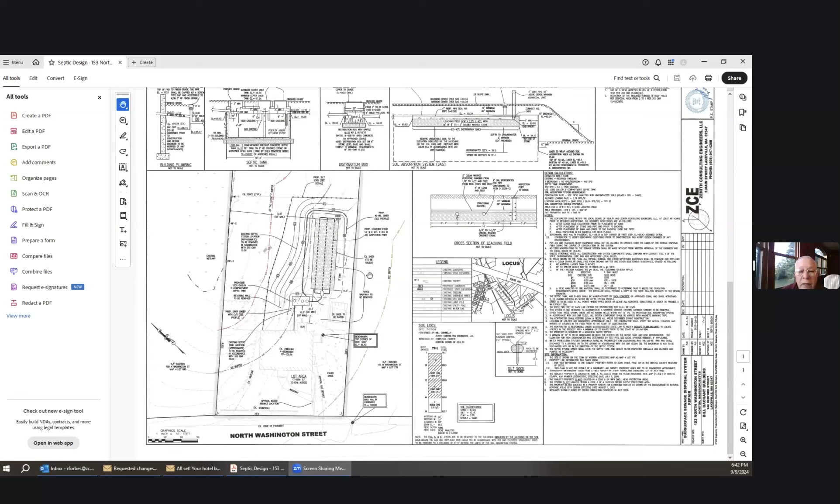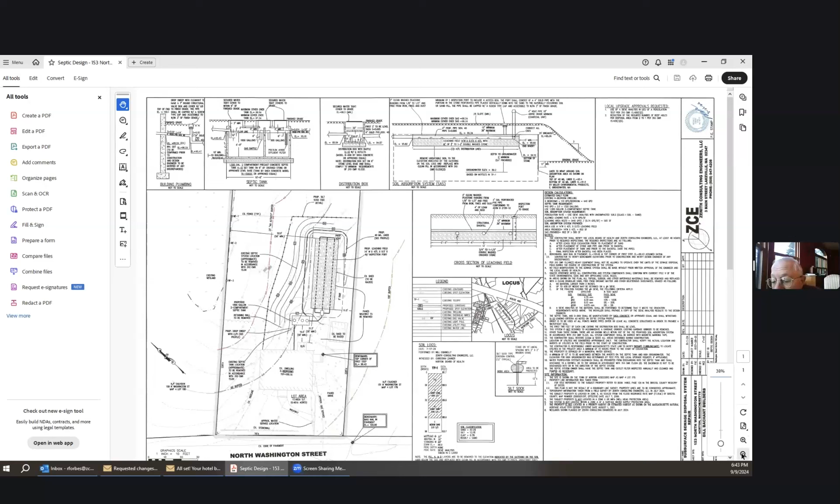Is everyone able to see that? We can, and if you can just expand it just a little, I think it'll be easier. Wrong way. There we go. Maybe one more. Wrong way. Doesn't really give you. There we go. Oh, I see. It doesn't. One more plus click. Oh, that may be too much. Okay, looks good.

Yeah, so the site is 153 North Washington Street. There's an existing 4-bedroom house with a failed septic on site, which we're proposing an upgrade to. As you can see, there is a wetland bordering the site to the west. We're proposing a 1,500-gallon septic tank, 14 by 43 stone and pipe leaching field, which we were able to keep over 50 feet away from the wetlands. There's also a couple sheds on the property that are going to be removed prior to construction of the system. And there's also a portion of a paved walkway, which is going to be removed and eventually loamed and seeded.

We're proposing silt sock, which goes around the limit of work. That'll remain in place until the site is stabilized with loam and seed. So if there's any questions, I'd be happy to answer them.

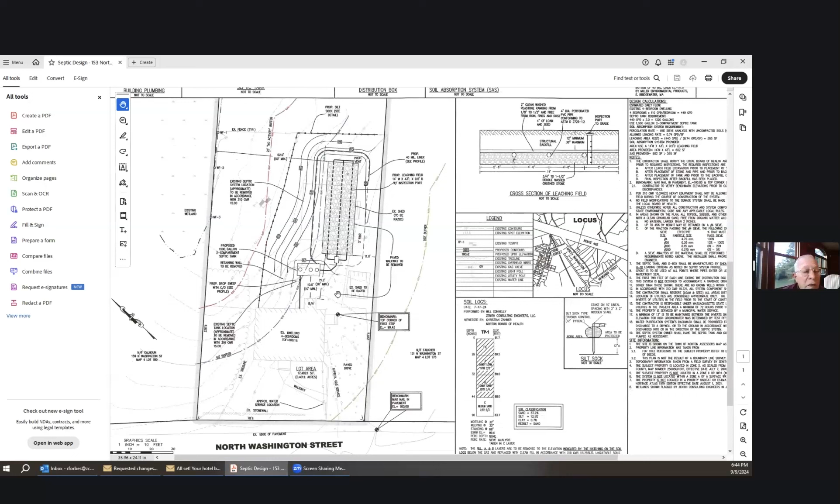John, I'm assuming this is pretty straightforward and you don't have any comments, or do you? No, in my memo that I provided the commission, I don't have any major red flags or concerns with this project. Any questions or comments from members of the commission?

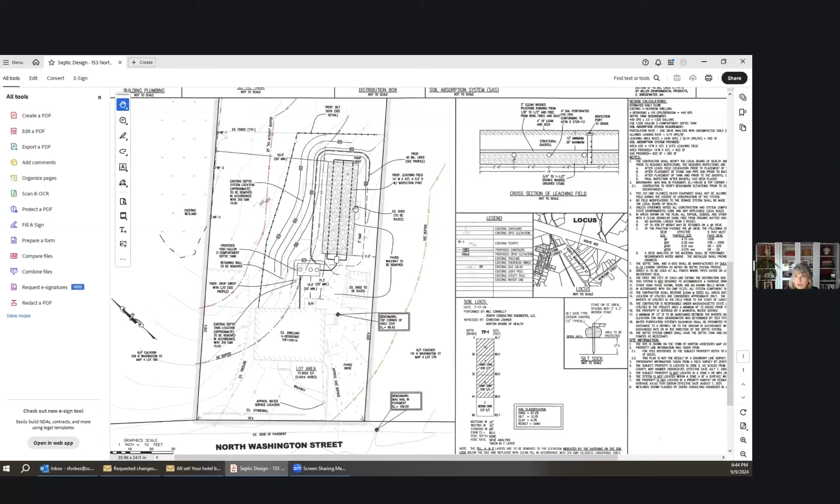I just have two quick ones. So is there a note somewhere in the plan that says all disturbed areas will be loamed and seeded after construction? And if there isn't, if you could add it. We do typically have one. Let me see if I can find it. Oh, yeah, I see it, 13 or 12. Can't see it quickly.

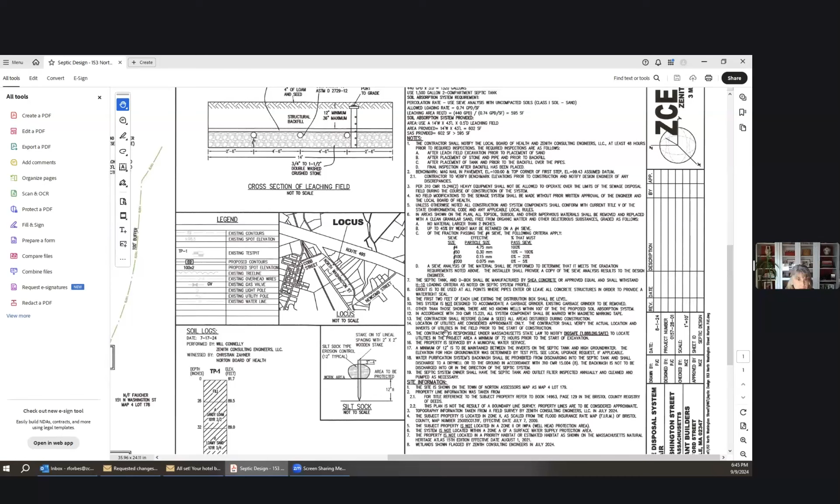Okay, and then your silt sock. So we no longer put the stake through the silt sock because it compromises the netting and the material right away. So I would just ask you, I won't hold up this issuance, to switch that detail out for a silt sock that shows the stakes on either side of it. Okay, yeah, we can certainly update that detail. Okay, that's all I have.

So any questions from anyone in the meeting? And you can either go to the reactions button and raise your hand, or just take your mic off mute and introduce yourself.

But if there are no further questions, this is a pretty straightforward repair with sedimentation control, a simple project. So I think we have enough information to go ahead and entertain a motion to close for issuing of an order of conditions at our next meeting.

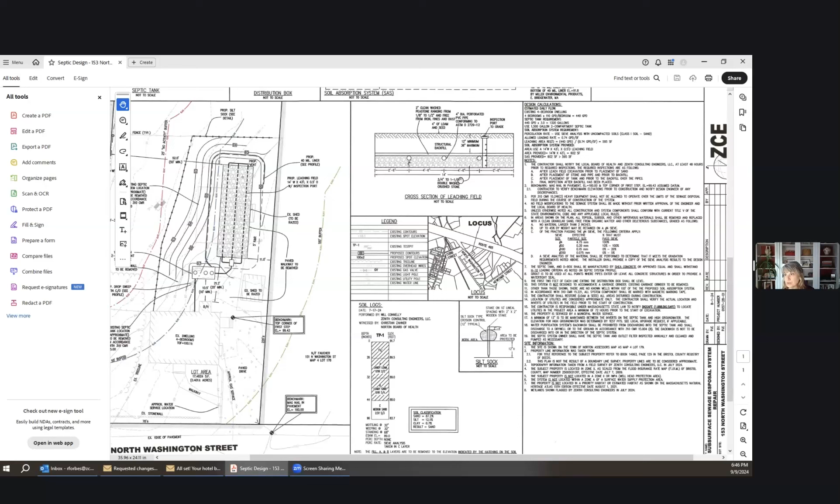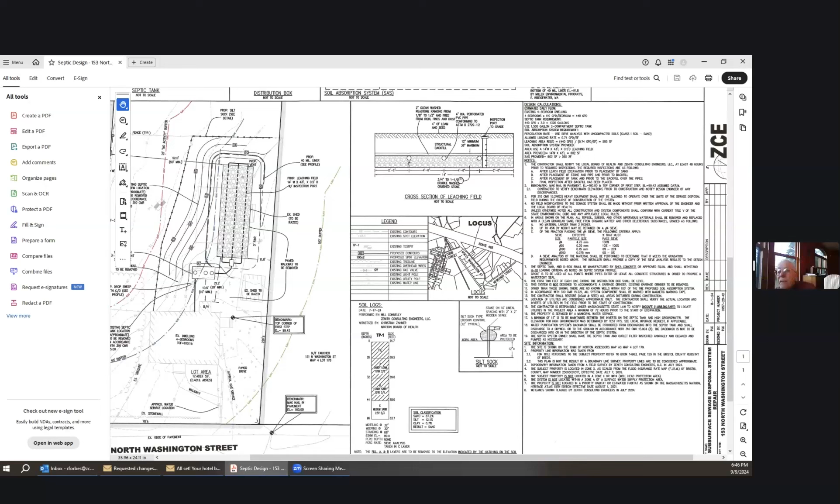I'll make a motion to close the public hearing for file 250-1164. Second. We have a motion by Lisa, seconded by Joe. Roll call: Dan and Tama, how do you vote? Aye. Aye. Mark, aye. Lisa? Aye. Joe and Paxton? Aye. Aye. And I'll throw in an aye. The motion carries. So thank you, Will.

I don't know if you really have to attend the next meeting, but we'll be discussing the orders and issuing the orders next time. And that meeting is on September 23rd. Okay, thank you all for your time. You bet, thank you.

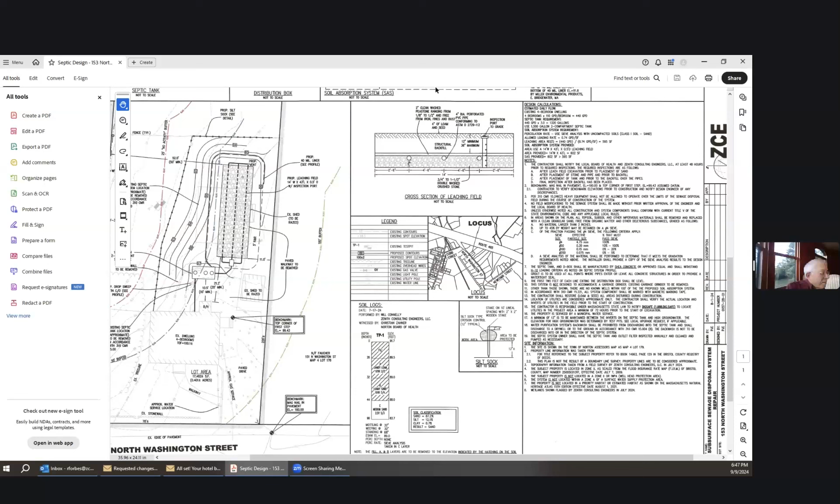Next hearing, it's also a new hearing, file number 250-1163. It concerns 400 Arnold Palmer Boulevard, notice of intent, and it concerns renovations at the golf course, in particular holes 2, 7, and 10.

So do we have a representative of the applicant? Yes, Mr. Chairman, Sarah Stearns with Beals and Thomas for TPC Boston. Also on the line is the club superintendent, Kyle Elliott, somewhere on here.

All right. And again, I think you'll be able to share your screen, Megan, should be all set for that. Can't do it yet. Right. Megan, you just want to transfer host over to me? Yep, thanks. You should be all set. You're good, sir. Okay, how's that? It's coming.

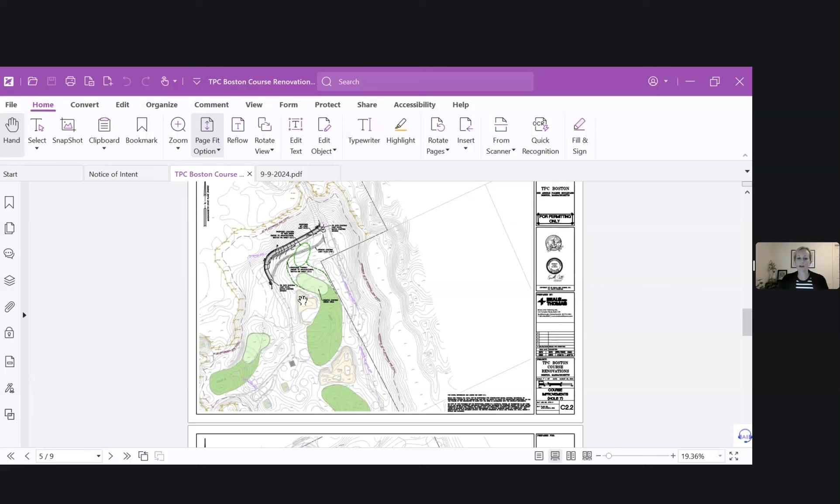And then finally, hole 10, which is in the northern part of the property — again, just a reorientation of the green area.

I should note that neither of the ponds on hole 2 and hole 10 are used for irrigation, so it's not necessarily water that's used for the club. These are natural ponds — well, this one's a natural pond, and just sort of an aesthetic feature and wildlife habitat area.

So again, this is buffer zone work proposed to modify this hole. I had seen multiple iterations of all of these designs to achieve the club's goals while avoiding and minimizing work in jurisdictional resource areas to the extent that made sense. So our final proposal to you is something that's been drawn and redrawn several times over.

This is just a sketch of the proposed mitigation area. We were fortunate enough to have John Thomas join us on a visit to the areas of proposed work. So thank you, John, for taking the time to do that and to look at these resource areas and what the club is proposing.

So that's really it. I'll pause there and I'm happy to answer any questions you may have, and Kyle as well.

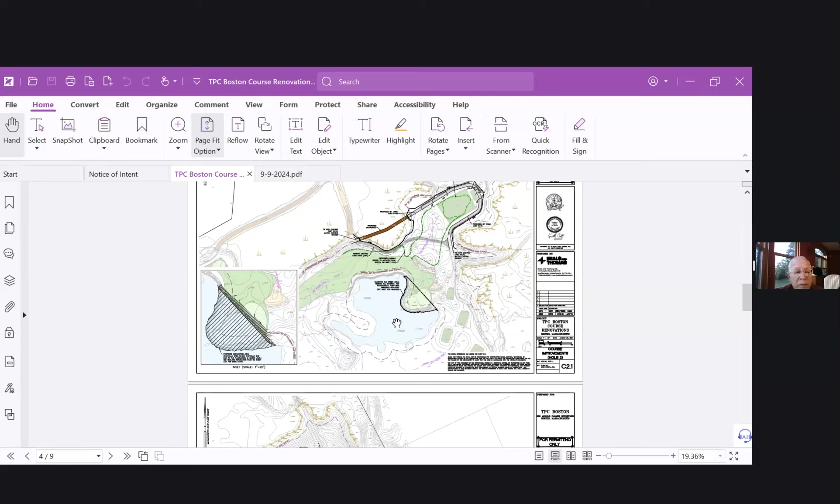Any questions from other commission members? John, do you have any comments? I have a question, go ahead.

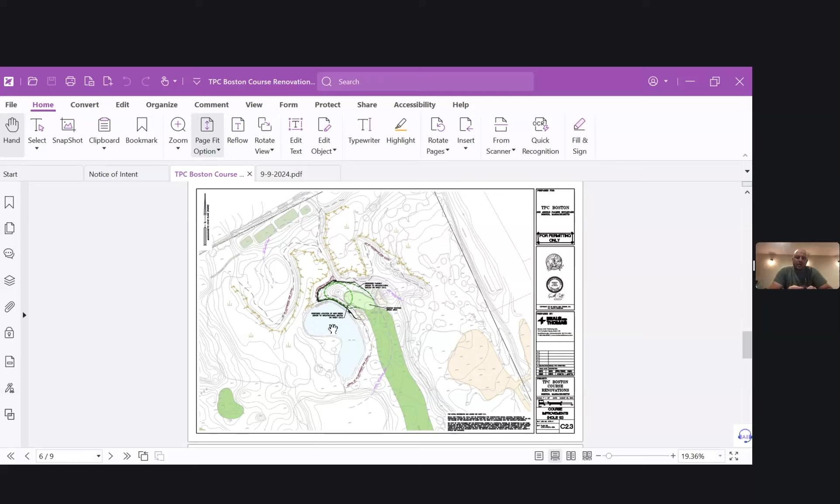On hole 10, where we're coming into that pond, is that a man-made pond? This one, I think, at least in part, was there when the golf course was constructed. I believe it was man-made and then slightly expanded upon initial construction of the golf course.

We're assuming jurisdiction on both, so we've added buffer zones to your local and the 100-foot, just a conservative approach so that we're showing everything being proposed in these areas. My question is, around this pond, will there be limited pesticide, insecticide, and fertilizer uses in this area?

We always limit any pesticides we're applying near any body of water, so we do minimal applications as possible. Our main focus is removing any invasives that begin to grow, and that's about it. I think that area and the proximity of the pond with the new green would largely remain unchanged from the current location we have.

One of my concerns is fertility leachage back into that area. So fertilizers or pesticides is the question. All of the above.

I would assume your complete best management practices addresses that, but these are obviously sand-based greens. Yes, correct, sand-based constructed greens with internal drainage, back to pond, back to basin. Each drain outfalls in a different area for each green. None of them, to the best of my knowledge, drain into a pond or waterway directly like that. Obviously our property has a lot of wetlands, as you can see from the maps.

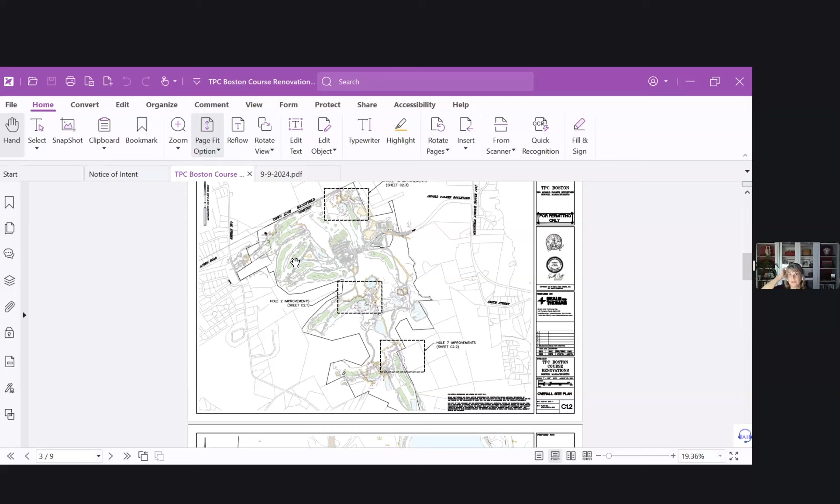Yeah, I have a number of questions. The first one is, the folks were before us several years ago, and at one point Jennifer, the last agent, had asked you to go back through the files to figure out what the cumulative impacts were for this course. I believe maybe the last order of conditions had that in the findings. So John Thomas, if you could find that.

So in other words, the meter's ticking, right? They only have 5,000 square feet that they can impact on this site. So at one point, they kept coming back to us for whatever they needed to do, and at one point we said, well, hold on, we've got to keep track of what's going on here. So we asked somebody to uncover that last order of conditions to see what limit we're at towards the 5,000.

And if we can go through hole 2 — can you talk about the detail of how that walkway is going to be? Is it pile supported? Is it going to span the wetland? What's the diameter of the piles, what it's made out of, what the grading is going to look like? I haven't seen any grading on any of these, probably just zoomed out a little too far.

These sheets are just overview sheets, but similar to the other footbridges we've permitted with the commission out here, same design, pile supported. Do you have a detail?

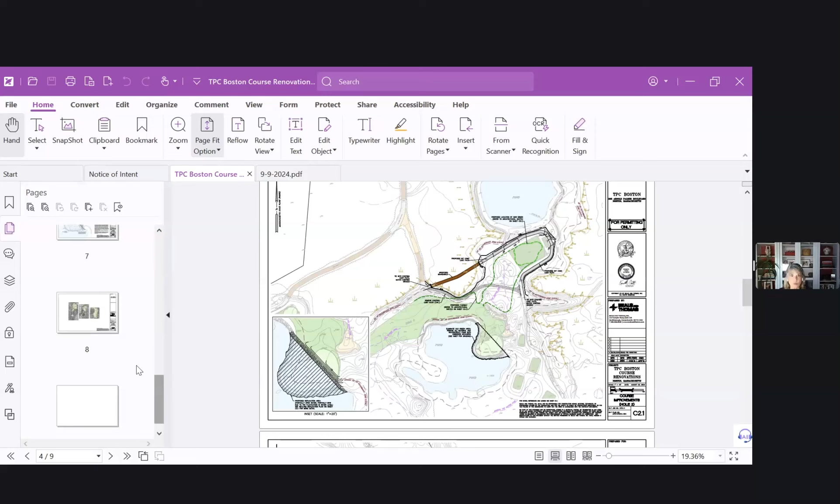I believe so, and if not, we're certainly happy to provide that. These plans are enormous, so it might take a second to load. Is it going to be timber, or what's it going to be constructed of? Yep, timber, like all the others out there, nothing different from what has been proposed and approved. The detail is on the 9th page.

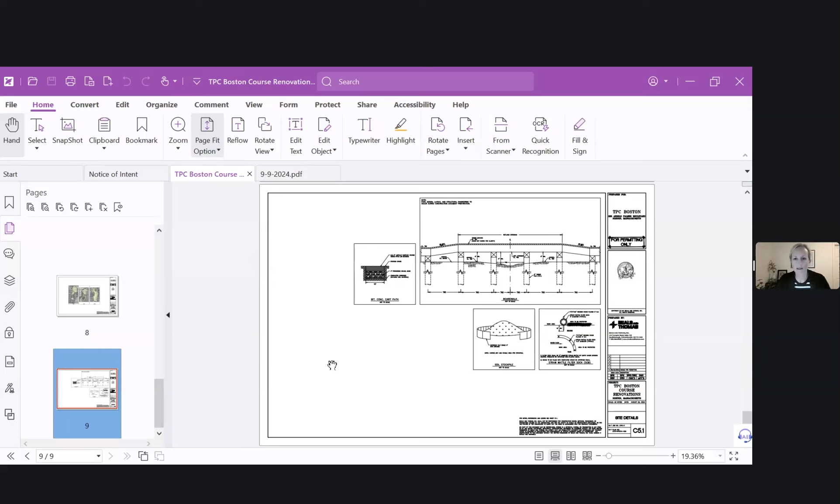So how many, is that a cross section? How many piles? I can't seem to center that on my screen for some reason. Okay, here we go. I'd have to get back to you on the number of piles, honestly. I don't have that information at my disposal.

Because we were told after our last proposal with the commission for a footbridge on the 8th hole, where the commission denied the project, we were issued a superseding order from DEP that the piles were not what the concern was for tabulating impact. It was the entirety of the surface of the bridge.

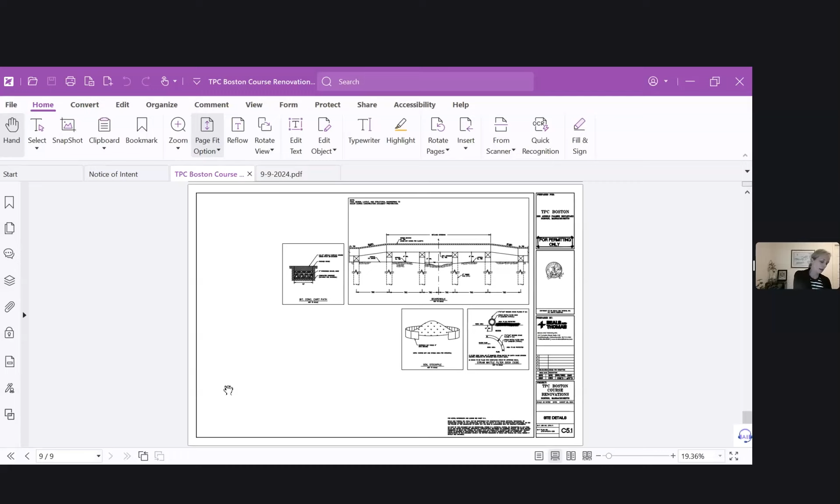So we appreciated that and took that approach for calculating impact on this one. I could make a note and get back to you on the number of piles for this length. Well, certainly, because although I appreciate the footprint of the bridge with shading impacts is the total impact, we're approving a bridge with piles. So we need to know how many piles you're proposing, or what the diameter is, how many there are. It's not just the footprint, we're approving the number of piles.

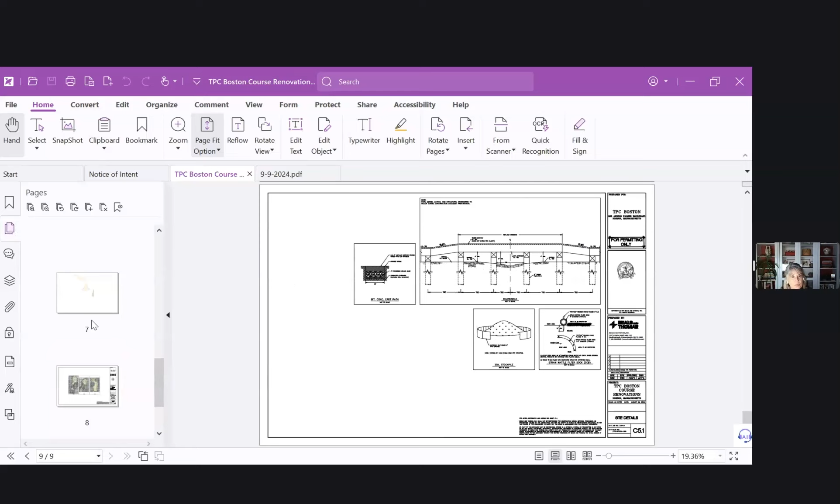No problem. So if you can go back, there's a grading plan? Just trying to get a handle on what the grading is associated with the footpath, and then maybe the touchdown points of the bridge deck. Yep, it's pretty minor since the grade is quite shallow in this area and we're connecting to existing paths.

This is not the best sheet to look at this. These are more just for presentation purposes, but we can get you something with an inset that shows the proposed grading. But again, since we're tying into existing grade where there's very little change, the required grading to make that transition is quite minimal.

Right, so typically when we approve a set of plans, it's what the contractor's going to use. So if you were to give this to a contractor, how do they know what the grades are? So that when we compare this to the as-built, we're not going to know if you're not showing us what the grades are. So we will need a grading plan.

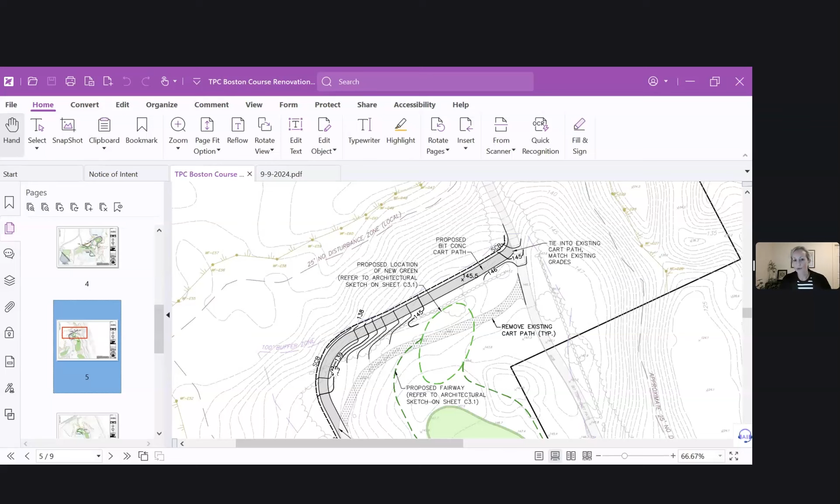Yeah, and in other areas of the proposed work, there is more grade, so you can see on sheet 7 where there's more grading involved. I think over here, there's just not much to show, but I will confirm that and get that back to you.

I'm also curious as to why—I understand it's a limited project, but typically you only play the limited project card if you can't meet the performance standards. So what performance standard can't you meet?

We can meet it, and you can ignore that—we can strike that. I'm always sort of mixed on whether I've been told to include it if you meet it, and other times we've been advised by DEP to not include it if you don't need it. So I put it in there. We can ignore it, we don't have to include that, but we can meet the performance standards, and obviously the replication is significantly beyond the impact. So ignore it.

So I would want to know, how does this 1,750 square feet factor into the impacts to date at the club? Are we approaching 5,000? You're already there. But I think the key is it's not 5,000 square feet for eternity on a piece of land, it is 5,000 square feet.

Then if that's mitigated, you're not limited to that for the rest of your life, or the rest of the life of the project or of the land. A perfect example to support that is the last footbridge the club proposed that was approved by DEP.

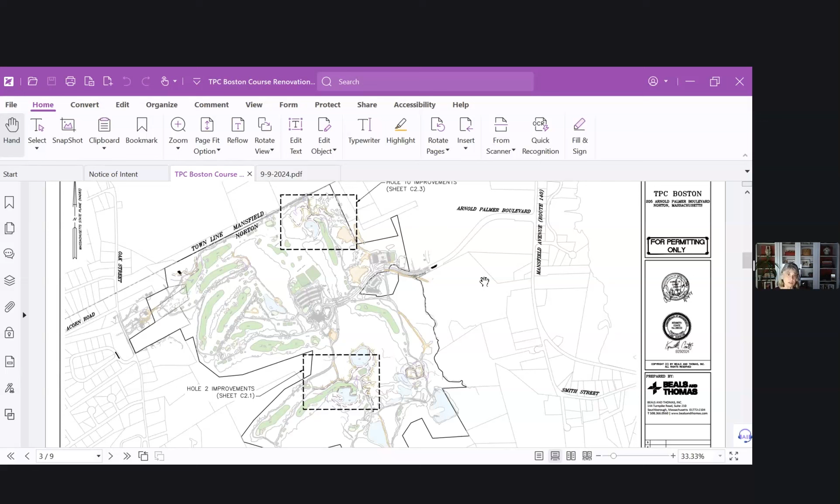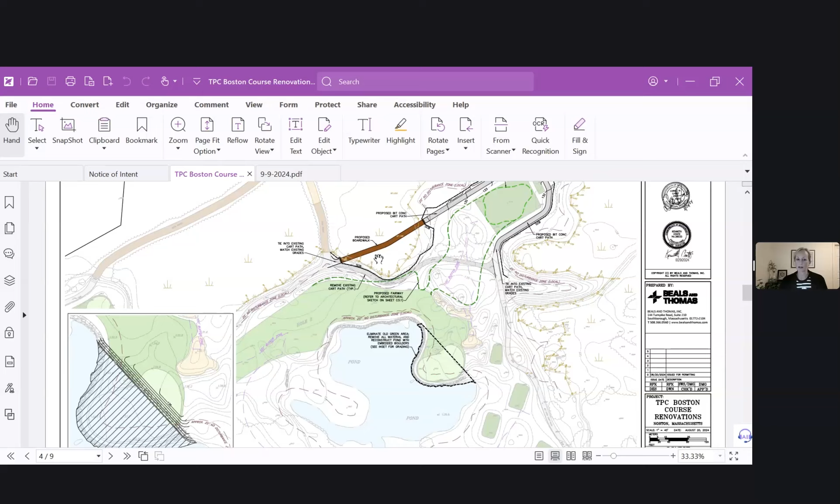If we can zoom in on number 2, please, again. So this is just like a wish list. It is necessary if this hole gets straightened out and pulled away from the pond, because this path is no longer viable. So yes, it is necessary to get the foot traffic off of the reconfigured hole. We tried to pick the crossing with the least amount of impact, tying into those existing paths. There's a shorter way to go, but there's more earthwork, more site work to get that bridge connected. We laid out a few different options crossing it at different locations, but the grading was more significant.

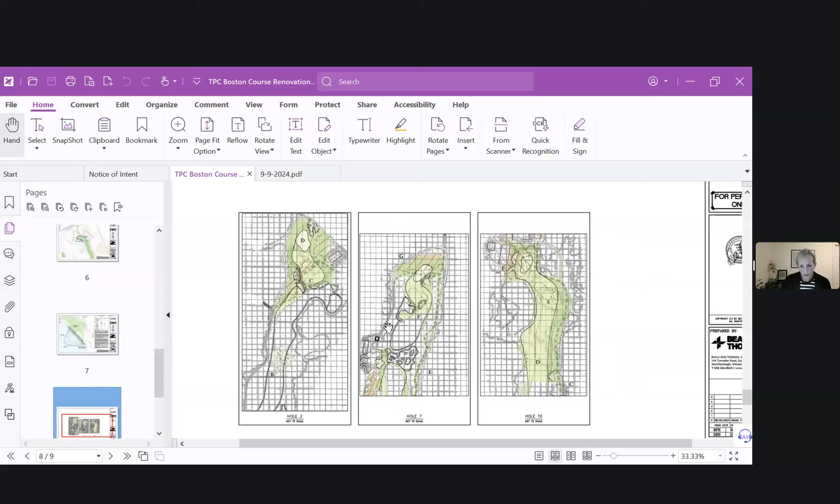Okay, and then are you showing any cut, you need to show the cuts and fills for the actual greens themselves? I'm just seeing a dashed outline, so I assume that's just the limit of the green and not the grading. So yeah, what we've laid out is based on an architectural grading plan, and this was sort of the vision by their golf course architect.

I would certainly not propose to grade a green as an engineering company, because that is a very specific skill for a golf course architect, particularly for a golf course of this caliber. If it's in the buffer zone, we can ask for some more information, but there's not a lot happening in this particular type of area.

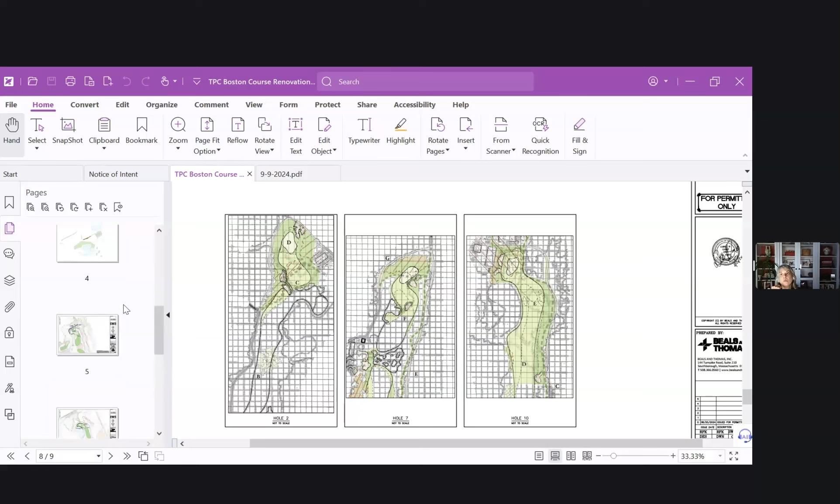Oh, all right, let's go back to 2. If you're proposing any grading to create that green, we need the grading, and it should be done by a civil, because we expect it every time somebody comes through the door. The landscape architect has the vision, the civil makes it come to life and makes it work. So that's the job of the civil. So I assume you're gonna have to get a civil on board.

We are a civil engineer, yeah. Okay, then you need to grade it out. So what's the top of elevation of that green going to be? We're at 133.8. We can revise that and get you something if you want to see.

We need to show the fill on the whole thing. Are you cutting? Are you filling? How is that green going to be constructed again? Because when we go back to the as-built, we have to look at how much fill did they put in, did they need a wall. This is basic. It's not a significant change here, but I hear what you're saying, understood. We would not approve line work. It has to be grading.

So let's go into that wetland. You mentioned that the functions and values of the pond right there, I think were those marginal on that side?

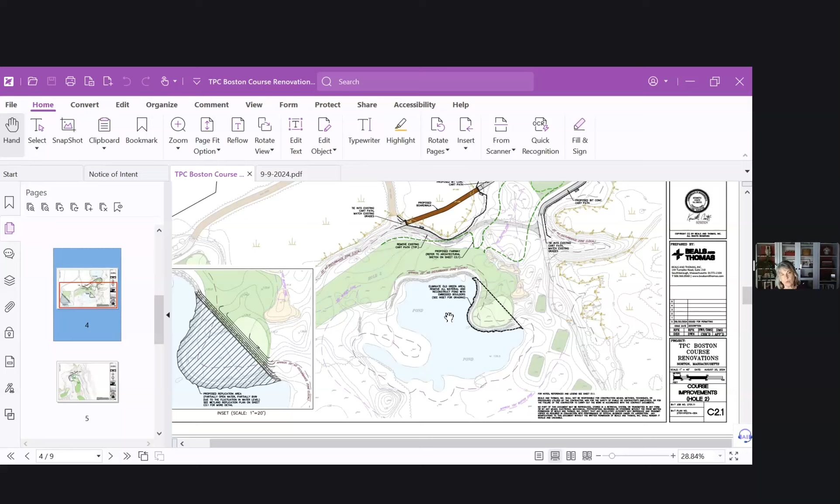So what I'm trying to get at is you're putting a footpath through a wetland. What's the value and function of that wetland versus what you're replicating? Is it marginal or high value? And what are we getting in turn for the mitigation? So you look at what you're impacting, what is the value of that wetland versus what you're recreating?

So this is a BVW, largely shrub saplings in this area. This area will be a mix of open water and palustrine shrub scrub wetland. Again, this whole area is variable depending on the season. The club is not using this for irrigation purposes, so the water level is not being artificially manipulated—it's really just seasonal change. So we're seeing a pretty diverse, ever-changing wetland system made up of open water and that emergent shrub scrub area.

So they are very close, at least in proximity. But to your point, this is a BVW and this would be replicated as open water and shrub scrub—not identical, but something that I think would add value for a variety of purposes in this particular area. But open water is not the same as a BVW.

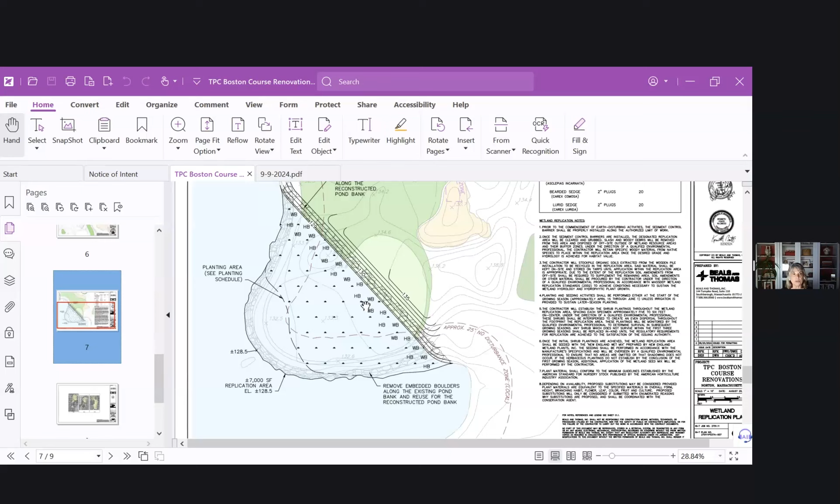Yeah, and we've seen on the other footbridges on the property—to the letter of the law it's an impact, but there are a lot of footbridges out here, and the areas below and adjacent to them are really thriving. So it's not a desecration of the BVW that it runs through; they've been built and maintained to the point where there is still sunlight being captured. We've got growth under and around all of them. We've got to follow what the regulations say in terms of impact mitigation, certainly, but for the commission's understanding, this is something the club has done numerous times, and I would say successfully. I think yes, it's an impact, but it's not a loss of BVW.

So in summary, we're gonna need to see grading around all those greens for 2, 7, and 10, and some details of the crossing itself—how many piles, quantification of the difference, the delta between the BVW and the open water sheet. And any cumulative overall impacts, so we can carry that forward in our findings. Are there any flood zones out here?

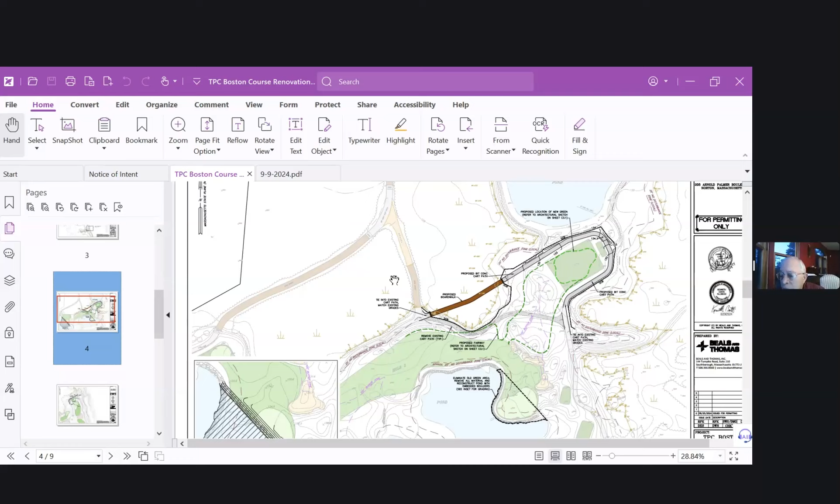So we do have a variety of items that need to be discussed, so I think we will need to continue this hearing. Our next meeting is on the 23rd of September, and we have October 7th and October 28th after that.

Do you have a preference? You want to continue to the next meeting? When would the supplemental information need to be received? I guess that's kind of the key for timing. So I need the information the Thursday before the meeting so I can take a look at it and then provide a report to the commission.

Okay, the 19th then? John? Yeah, I think we can do that. That's more than a week to get that pulled together. I think the 23rd is good for you? That works for me.

All right, so unless there are further questions, I think we can consider a motion to continue this hearing. So moved.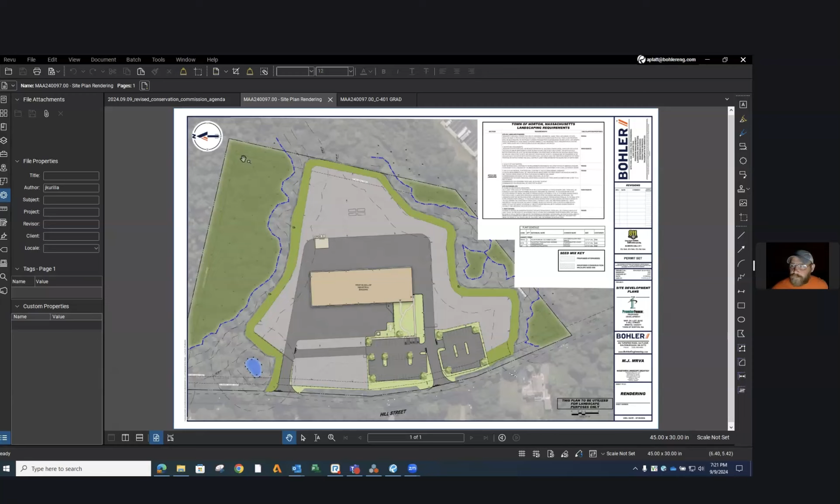Correct. I have a question—did we do anything to address the fuel storage area? We haven't revised the plans yet, but there will definitely be secondary containment, and I believe you wanted us to move the fuel pumps within the paved area, so yes, we will do that.

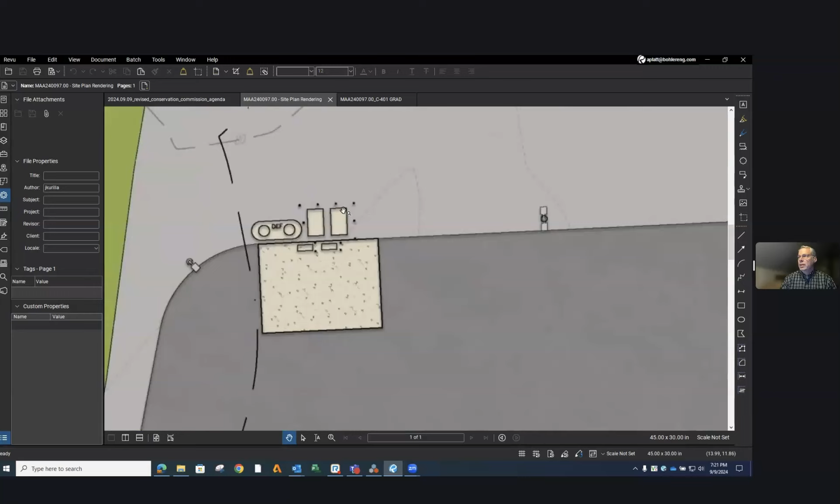Will there be any bollards or anything around the structure for additional protection? Yeah, we're going to put bollards around—those little black dots are the bollards—and this plan will simply move those forward into the paved area. Thank you.

Any other questions from either commission members or anyone in the meeting?

So this is still something that has additional information coming forth from peer review, is that correct? Correct. We were expecting those peer review comments either last Friday or today. We still haven't seen them, so hopefully we'll see them tomorrow, and the plan is to turn those responses around as quickly as possible and get them to you.

I believe you just stated you need to see things by the 18th in order to be heard or be on the next meeting. So that's the plan right now, but it depends on when we get those peer review comments. Andy, the first thing Megan's doing tomorrow is hounding Weston and Sampson to get you that peer review—it's been long enough. Okay, thank you. You're welcome—they're getting sick of my emails, I promise you. Good, glad to hear it.

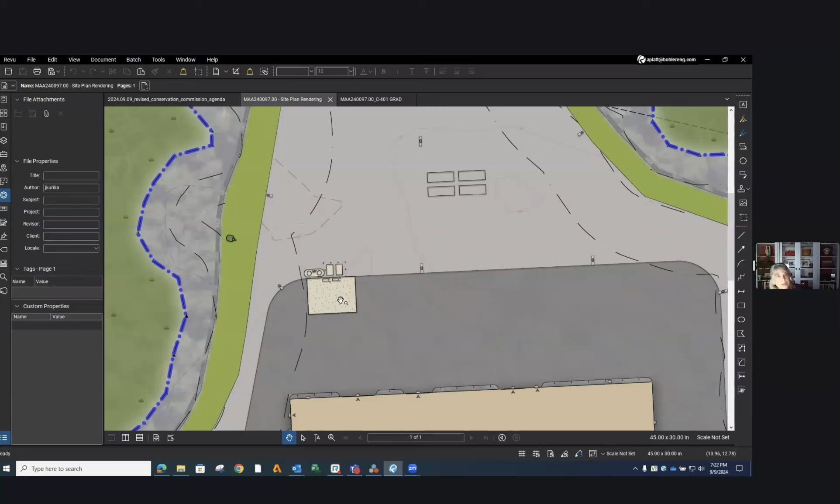So I just did have one question—where is the location that the forklifts will be kept?

When they're not in use? Yeah, I'm not sure if it's gonna be inside the building, but it'll definitely be on the pavement. All vehicles will be stored on the pavement at the very least.

So ideally, if you're going to leave that laydown area as stone and it's only a forklift going back there, is there going to be any type of fence or buffer between the edge of the pavement and the laydown area so trucks won't be tempted to drive back there?

No, we don't have any kind of barrier right now. I can address that, Andy. So the material is stored in aisles. The trucks will not drive down the aisles, there's no reason for them to go down there. Just imagine a lumber yard with aisles of stock. The forklift goes out, retrieves the material, brings it into the shop, we manufacture. The truck comes into the yard, we unload it on the pavement, and we take that stock and put it into the gravel inventory areas.

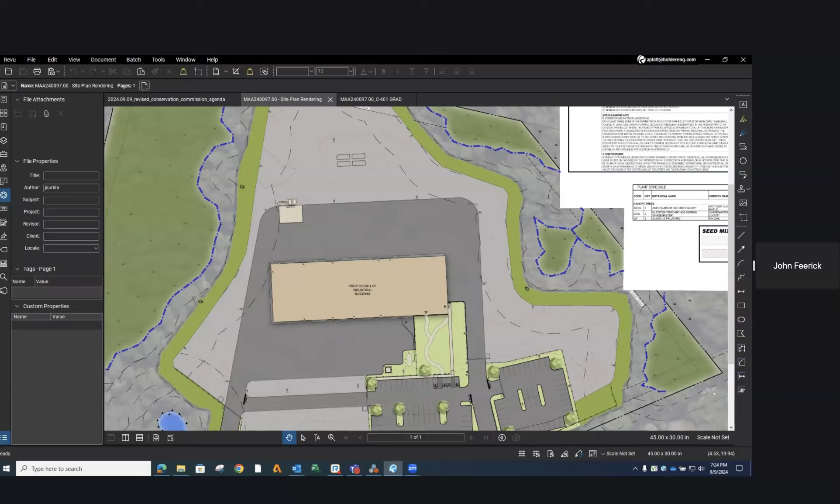Okay, hope that does it. Yeah, we just don't want to be like the truck police here, and have to look at this two years from now and see a bunch of equipment and trucks all over the place back there. We don't want to be in that position.

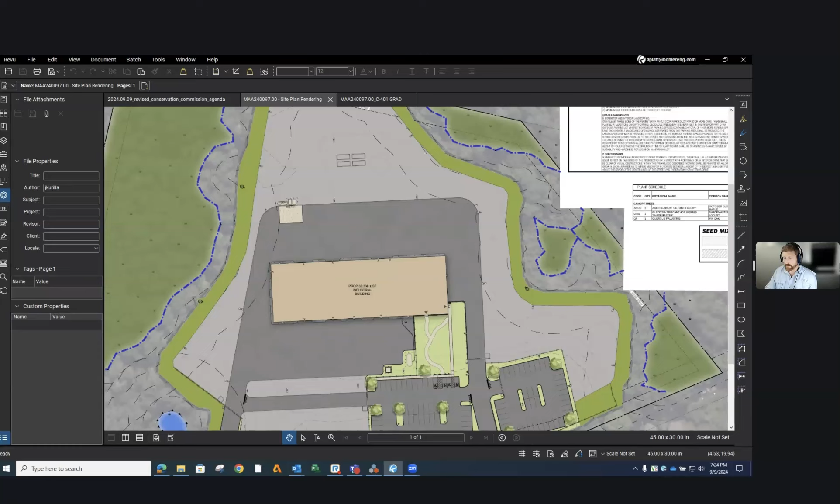Right, and the only purview we would have is within 100 feet of the resource area for this project anyway. So that'll be a condition in the order we issue, that storage of vehicles cannot be within the 100-foot buffer, unless it's within a paved area, and that would specifically say something like that.

Would the applicant and his client be okay with that? Yes, that's our intent. Okay, so that would be a potential condition in any issued order for this project. Okay, thank you both, Johns. Thank you.

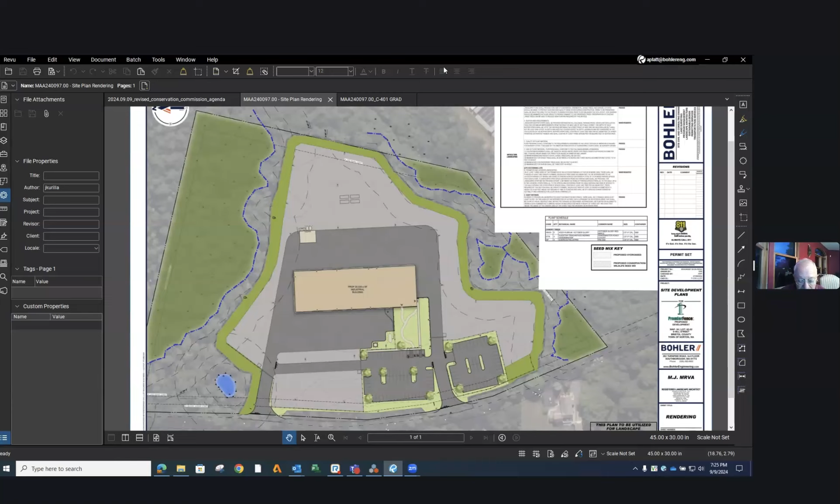All right, unless there are further questions or comments, I think we're all set for a motion for continuation until September 23rd. So moved. Second. So Dan, that was you, right? Yes. Motion by Dan, seconded by Joe.

Tama and Paxton, how do you vote? Aye. Aye. Joe and Lisa, aye, aye. Mark and Dan? Aye. Aye. And I'll throw in an aye as well. Thank you, Andrew. We'll see you next time. Okay, thank you very much.

Thank you. All right, that concludes our public hearings. We now have requests for certificates of compliance, and all of them are listed as being stabilized and all set for full COCs.

Our first is file number 250-1157, 5739 Anton Drive. I believe it was a septic system upgrade, and that is listed as fully stabilized. Yeah, this one was the one they had to do real quick, an emergency repair, so they actually got the seed stabilized, which was good.

I just noticed the number after this is also 1157, so which number is it? Where is 1157? Sorry, the one that's 1157 for 120 Mansfield is incorrect. Okay, so that one should be on the actual agenda. Oh, okay, sorry, yeah, I'm looking at your notes. Okay, yep, 120 Mansfield's 1109.

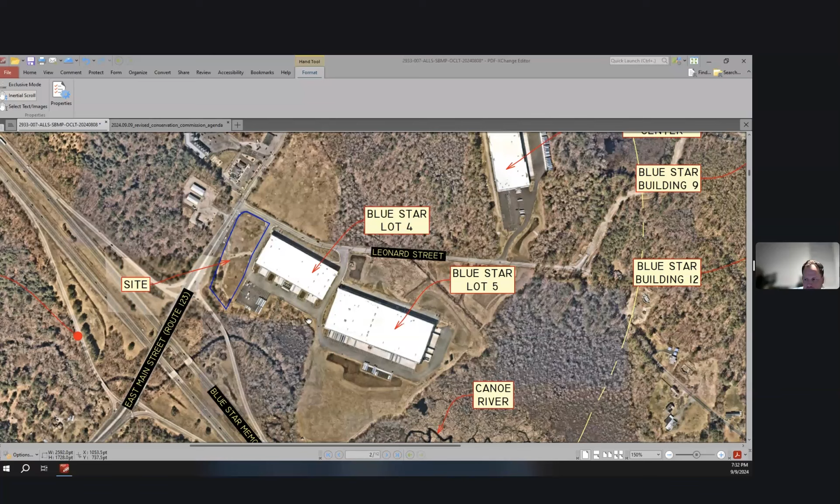You approved the plan. There was pretty much just a little work in the buffer zone, mostly removing some existing disturbance out of the buffer zone. We needed a special permit through planning, which was denied, but we've been working with the planning board and planning staff, and we think we've come to a plan that we're bringing before them in 2 weeks, hopefully that they will approve. So we wanted to just show you the changes. They're very minor, and in my opinion I'm not sure if they need a formal modification from the board, but that's what we're here to ask you.

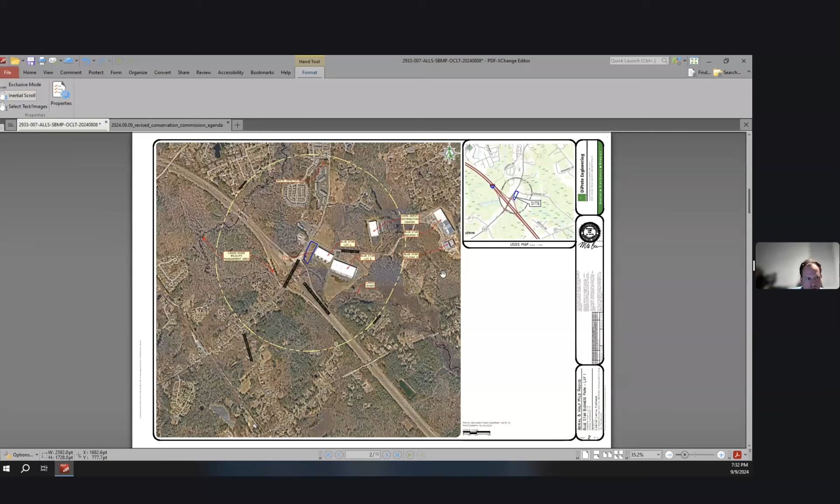This is the plan we submitted a few weeks ago to John. The change was we shrunk the building by about 25 feet off the front. This is East Main Street on your left, this is Leonard Street, the corner here. Your jurisdiction is in the rear of the site here. There's a 100-foot buffer off of the BVW here, and then there's a 200-foot riverfront off the stream in the back.

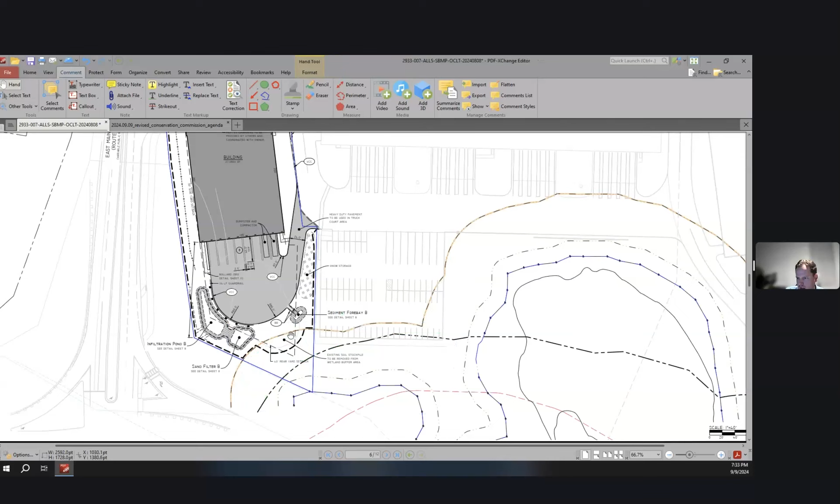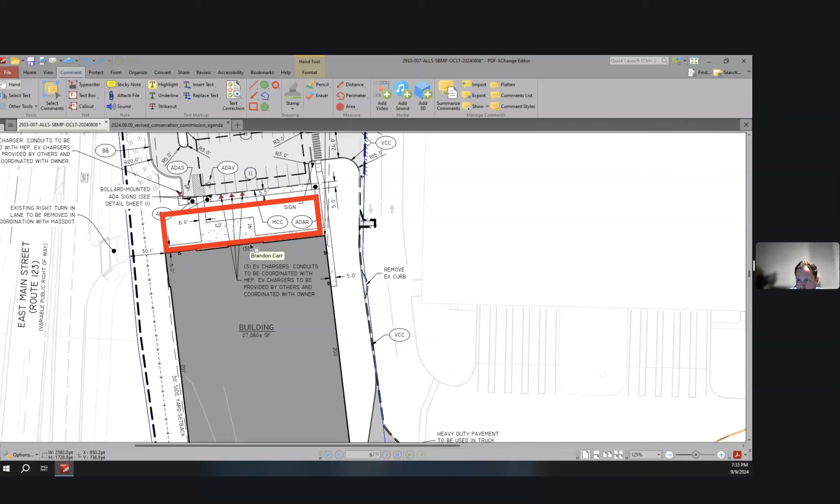You can see the only work within your buffer is this area, where there were some soil stockpiles that we're removing and revegetating. None of the drainage changed, none of the disturbance near the jurisdictional limits of your board changed. It was literally sliding the building back 25 feet or so. So we're losing about 3,000 square feet, a little over 3,000, out of a building that was a little over 30,000 square feet. We're leaving the parking and stormwater and everything the same, and extending the sidewalk.

We're adding a little bit of sidewalk for maybe some outdoor retail show space or something like that, depending - we don't have an actual user for this building yet. But other than that, the impervious coverage on the site overall decreases slightly, but we left the stormwater the same instead of redesigning everything.

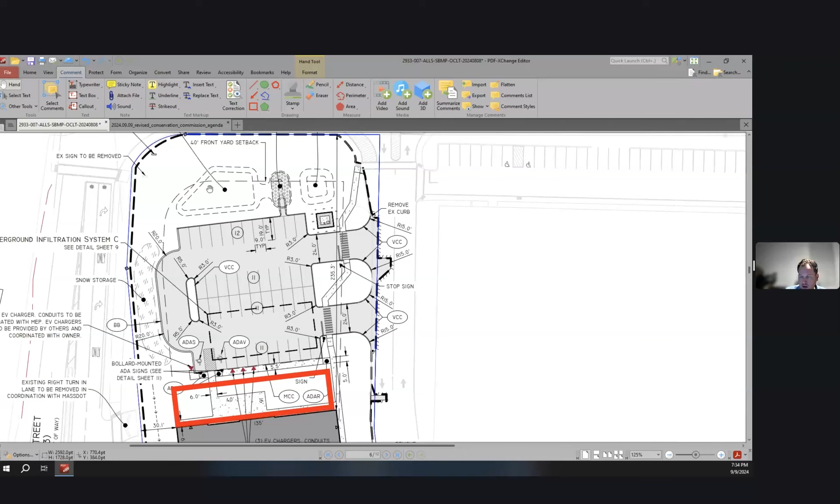So the building still goes to an underground infiltration system here. There's a small sand filter out here, an infiltration basin that handles the front parking lot, and similarly an infiltration pond and sand filter in the back that handles the truck court. So that's what we're here to show you tonight, and just verify that the board would be okay with this change.

So it sounds like - first of all, do I have to recuse?

Brandon, I don't know, it's up to you. Did I do it last time? I think you did. Okay, I will do it again.

From my perspective, this is a minor modification and I don't think it meets the amendment criteria. You're not changing the limit of work, you're not really doing anything major. It's going to be an overall improvement to the property, removing a portion of the building.

So I would be okay with just accepting the modification plan and putting it in the file, if the board members agree. I can arrange to have that done as part of this discussion. Yeah, to me this falls under administrative decision.

That's what John and I had spoken about, but just to be safe we wanted to show you and keep you updated on the project. I'd appreciate that, and hopefully we'll be approved by planning in a couple weeks and they can get started on this. So John, do you want a motion and a vote to say this is minor enough that it falls within your administrative discretion?

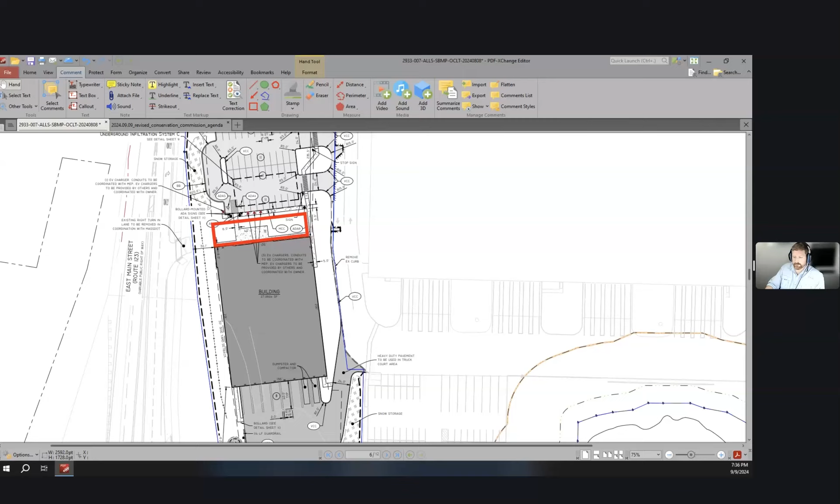All right, we are at conservation office updates, et cetera. So we are receiving a new town hall, pretty exciting. They started delivering all the storage bins, all 600 of them today, so we're up to our necks in orange bins.

We're ready for it. How did that go? You got a lot of work tomorrow, Reagan. I already started, so.

We're also going to have a new conference room right across from where the conservation office is going to be, so that's pretty exciting. I got to actually take a tour of the new building, and everything looks, well the furniture wasn't in, but everything looks a lot better than what we currently have, so that's a plus.

So to keep going with conservation updates, I did speak with Brad Holmes from ECR. I'm going to be meeting with him tomorrow to look at the limits of the restoration area, and we can go out there and stake it so they can get going.

So the potential enforcement action over at 258 Plain Street, they are actually kind of in a pickle. They're not going to be pursuing the expansion of their facility, or the addition they were proposing, so they will be coming in with a restoration plan. They've hired a wetland consultant to help them out with that, so they'll be coming with a restoration plan for mitigating the previous non-compliance, and we'll be getting an update on them.